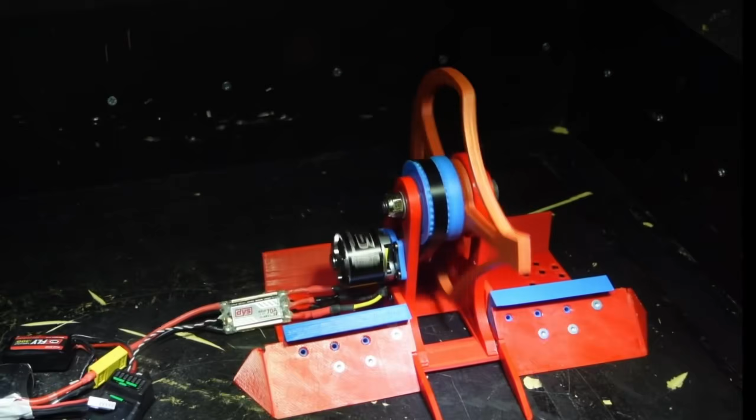In today's video, we're talking about robot spinner weapon systems, how to get from this to this, or even this.

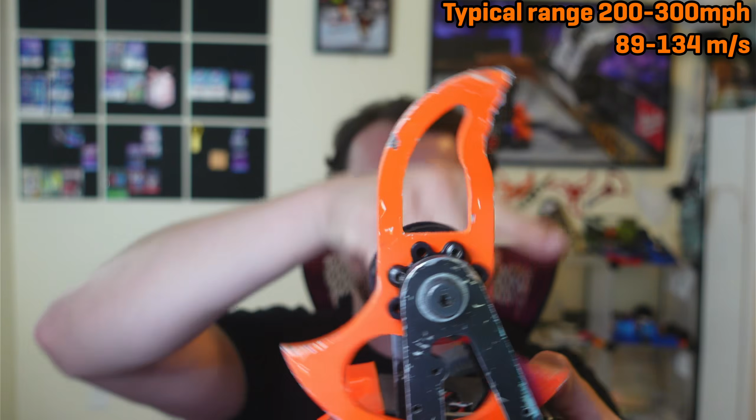Next, you've got tip speed. Tip speed, again, is a bit of a personal preference thing, but there's a range that most people tend to fall within. That is between 200 miles an hour and 300 miles an hour, generally around the 250 mile an hour mark. Tip speed is literally how fast in linear speed the tip of the blade is going around in a circle. And it can be calculated by knowing the diameter and the RPM, or you can simply back calculate the RPM from a design tip speed, which I will cover in a minute.

But essentially there is a nice little mathematical formula. Revolutions per minute times pi times the blade diameter is equal to your tip speed. It's because 1 rotation times pi times the diameter is the circumference, and that's the distance that the blade tip travels in a circle per revolution, and then revolutions per minute gives you that distance divided by time, which is speed. And then you just have to convert units to miles per hour or whatever you'd like.

Higher tip speeds mean that your motor has to work harder to get up to speed, and it'll take longer to spin up your weapon to maximum speed. And the air resistance on a spinning mass or a spinning blade gets exponentially higher the faster your tip speed goes. This is why I recommend against going higher than 300 miles an hour, because if you try to double your tip speed, you actually need about 8 times the power in your motor, battery, and speed controller to support that speed, and it gets crazy trying to find a component that can actually survive this.

And honestly, with how fast robots are able to drive towards each other and how fast the blade is spinning, you also start to lose out on what's called bite, which is basically if you have the blade spinning too fast, then you only drive so slow, you only get the very tip of your blade to engage, whereas if it's spinning relatively slowly and you move quickly, you can get the entire tooth of your blade to engage with the opponent, and this tends to allow you to rip off chunks and launch them into the ceiling and stuff like that. So a relatively slow tip speed plus a moderate to fast drivetrain will actually sometimes allow you to do a lot more damage than spinning your weapon a billion miles an hour.

Next, choosing your weapon motor. Now for picking weapon motors, I've divided this into 2 separate sections. You've got option A, which is the easier route, which is to use one of the hub motors that myself and a few other combat robot suppliers sell. These are designed to have a weapon direct driven on the motor. You can't use a normal motor for this in almost any use case that you might practically find for a beetle weight robot, simply because the bearings in the shaft of the motor aren't designed for that kind of force, and they will just break.

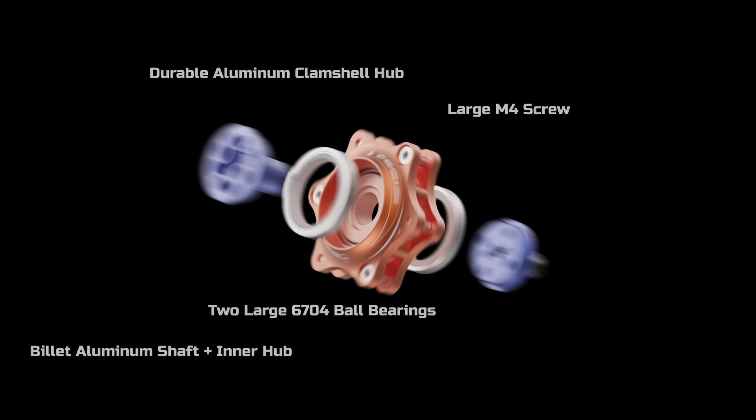For ant weights, you can sometimes get away with it, like I did on my 1-pound bot Sonic back there, but every time Sonic, which is a small vertical spinner, fought a horizontal spinner, the motor shaft would snap in half. So I developed a special ant weight hub motor, which should alleviate this problem. The RDY 5022 Mini is kind of designed for ant weights, but you could also use it on a beetle weight with a smallish weapon.

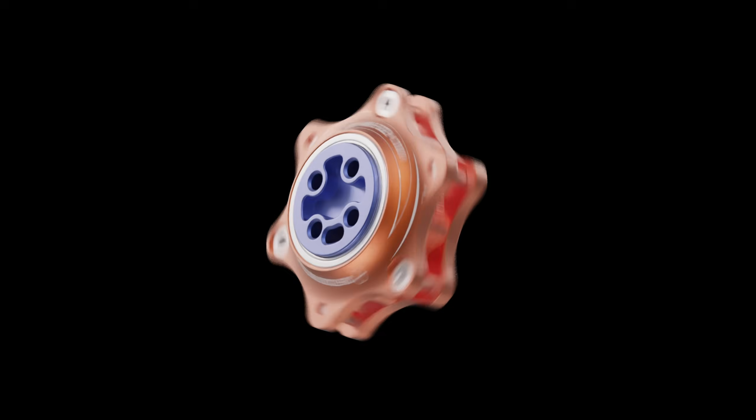Just expect the motor might not survive the biggest possible hits in the 3-pound class, and it also isn't going to be able to support as big and heavy of a weapon or as large a diameter of a weapon as my beetle weight hub motor, which is known as the 5536. Both of those dimensions are simply the diameter in millimeters and the width in millimeters. So the 5536 is 55 millimeters in diameter, 36 millimeters wide, and the 5022 is 50 millimeters in diameter roughly and 22 millimeters wide.

So if you're choosing a hub motor, there's only a few kV options to choose from, but it's always fine to change that tip speed a little bit, I think. So with the RDY 5536 for beetle weights, right now I have 2 kV options, 1200 and 900, and for the mini version, the 5022, right now I have 2 kV options as well, which are 1100 and 1700, because those are meant for smaller diameter weapons that would spin faster.

I have a handy tip speed and blade diameter chart that even looks at different voltages, so there is a link to that down below, and there will be in the blog post as well, and that'll basically let you look at a chart of, oh, this battery voltage with this diameter blade, I can get this tip speed with this kV of hub motor. And that'll make your choices a lot easier.

Now we can move on to the much more complicated section, which is trying to do a belt drive system.

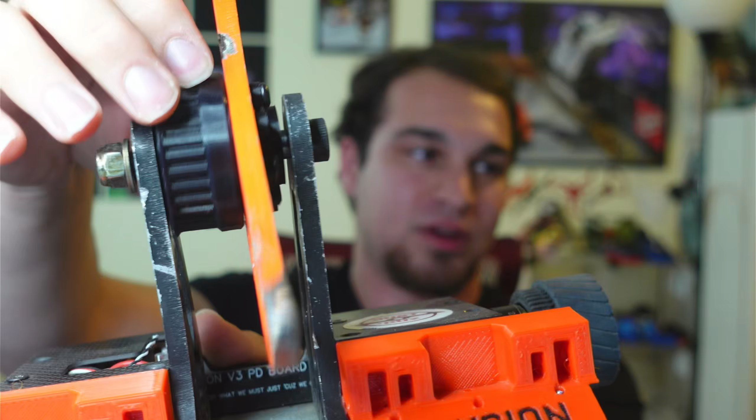A belt setup allows you to put a pulley with just a little bit of tension on that motor shaft going to a bigger pulley that typically will have a dead shaft and big bearings inside of it. And that way you've got your weapon hub being just a pulley basically with bearings pressed in and then a blade bolted onto that pulley. And that's exactly what we have in Division here. So here I've got my blade bolted onto a pulley, which is a 3D printed nylon pulley in this case. There's bearings inside of that and a big shoulder bolt shaft.

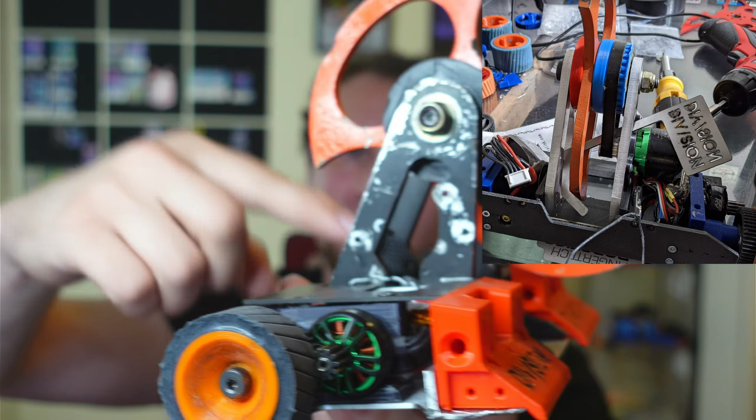Shoulder bolts are a fantastic way to make a dead shaft because they're very precise and designed to have bearings run on them, and they're readily available for just a few bucks a piece. And then I've got some 1/4 inch thick aluminum uprights supporting the weapon, and down here with these 4 bolt holes is where a weapon motor typically would mount if I hadn't removed it from this one, with a pulley just going right from here up to there. And I'll show that in the CAD view in a minute.

So essentially what you're trying to do here is you can compensate for not having the exact right kV of motor by simply having the motor spin generally a lot faster than your weapon RPM and just have a smaller pulley on the motor and a bigger pulley on the weapon. And so now you can basically be free to use almost any motor and almost any voltage battery as long as you can compensate for that with the ratio between your big weapon pulley and small motor pulley.

How exactly you determine that ratio is pretty straightforward now that we've already figured out what our ideal weapon RPM or ideal motor kV would be. So, like I said before, you've calculated your weapon RPM and you've basically figured out, oh, if I want to run a 4-cell battery, my RPM divided by 14.8 is what kV ideally I would have for my motor setup.

But let's say you've decided that you want to use an 8-inch diameter blade with a 4-cell battery. You might find that with a 1-to-1 ratio, you would only need a 720 kV motor. But if you're not using a gigantic motor, you're usually not going to find a weapon motor that has that low of a kV. The larger the motors, typically the lower the kV range they're available in. But if you just use a motor that's 1440 kV instead, and you have a pulley that's twice as big on your weapon as it is on the motor, then all of a sudden you can get away using that same motor without your weapon speed being twice as fast.

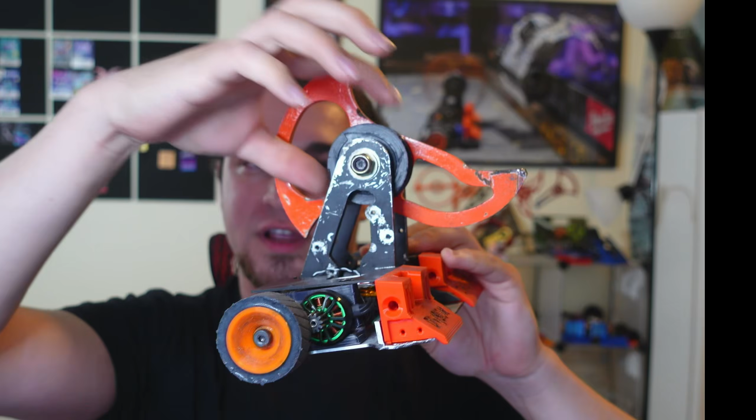So for Division, this version of Division, this blade is a 7.5-inch diameter. I used a 4-cell battery in here, and I used an 1850 kV motor with a 10-tooth pulley on the motor and a 30-tooth 3D printed pulley on the weapon. So every 3 times the motor would spin, this weapon would spin once. And so the weapon had a max speed of 9,126 RPM, even though the motor was spinning at 27,000 RPM. So this meant I had a tip speed of around 204 miles an hour, and that was plenty to do a ton of damage with such a big and heavy weapon.

Here's a speed round of different tips for doing a belt ratio setup. So for ant weights, a 3mm pitch belt or S3M like you can find on Fingertech, or HTD 3mm, which is essentially the same thing. Those will work great. For beta weights, I would recommend using an XL belt. This is a 5mm pitch or 0.2 inch pitch, which is what I used on Division here, and that held up much better. People snap S3M belts all the time on beta weights and just don't even bother.

I would recommend you buy an aluminum pulley with either a set screw or clamping hub to fix to your motor shaft, but you can usually get away with 3D printing the pulley on your weapon setup like I just showed you here. Nylon or super PLA are probably going to be good options for printed pulleys for a toothed belt setup. Because you're distributing the force over so many small teeth, you don't need a really strong metal pulley. But if you're running something like a V-belt setup where you're having friction drive everything, every time the weapon stops and the motor keeps spinning, it's going to basically burn up that pulley if it's made out of plastic, and it'll start to melt.

So you do need to generally use metal pulleys if you're running V-belts instead of timing belts with teeth on them. You're going to need an exact center-to-center distance between your motor shaft and your weapon shaft, and to calculate that for given size pulleys, there's a bunch of online calculators. I like this one by BB-Man that I'll link below, but there's one from Fingertech for their size belts as well. The BB-Man calculator works for pretty much any timing belts that you could find.

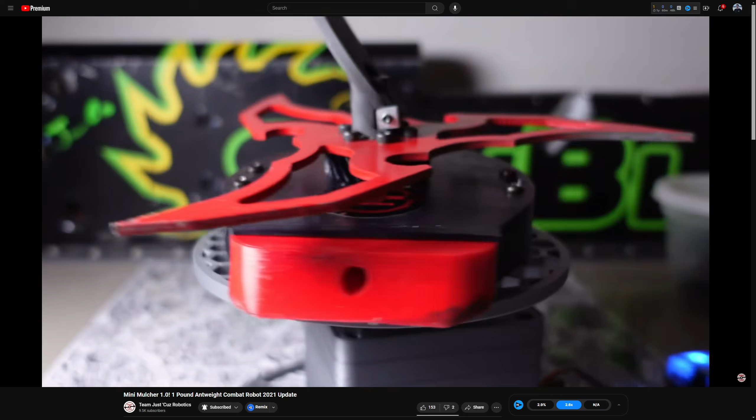And also, for some designs, you might be able to get rid of the belt entirely and use gears to drive your weapon. I did this on my Antweight overhead spinner mini mulcher. You do need to have the motor really close to your weapon shaft to do this, so it doesn't work for all designs, and you're also transferring a lot more of the shock loads from every weapon hit into your motor.

But if you have a beefy enough motor, or you try printing one of the gears in TPU or a more flexible material, you might be able to absorb some of that shock and have it work out for you anyway. Just be careful, because at really high RPMs, 3D printed gears will absolutely start to melt. And unlike timing belts, you're not distributing the force over a bunch of teeth, you're distributing the force over like 2 teeth. So you might end up needing to use metal gears.

Speed controller sizing and choices. This again gets a little complicated only because manufacturers don't provide great data. All of the speed controllers meant for drones are rated for the type of load experienced in a drone, not the type of load experienced in a combat robot.